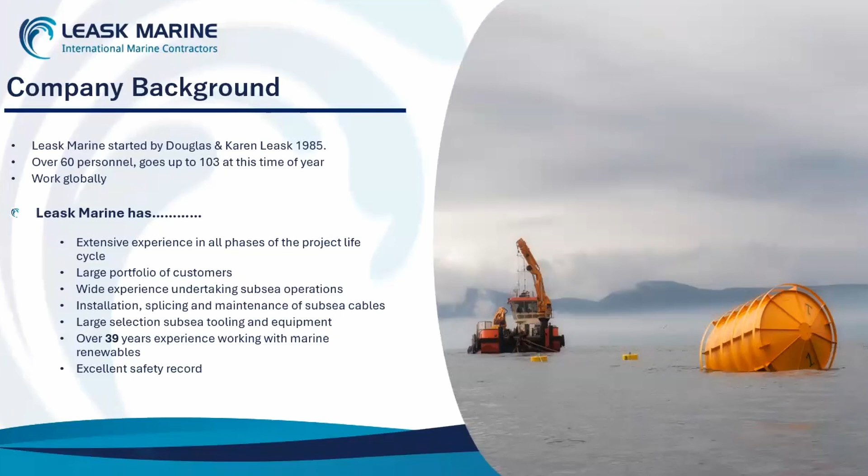With now over 39 years of experience, Leask Marine is in a prime position to make the most of the opportunities around Orkney, and has an excellent safety record which is highly valued by clients who come to use their experience. Over this period of time, they've undertaken a huge number of different operations, some of which are shown here on this slide.

Of most significance is the fact that they've operated for nearly 500,000 vessel operating hours and performed over 45,000 dives. The total number of projects engaged in is nearly 1,000, and over time this will continue to grow. They have experience in wave and tidal, offshore wind, marine construction, renewable infrastructure, and so many other things that go on in the seas around Orkney and increasingly around the world.

The fleet comprises a number of vessels. These have been built up over a period of time, and Leask Marine have extended from initially working around fish farms and small construction to now working across the world with a number of different vessels.

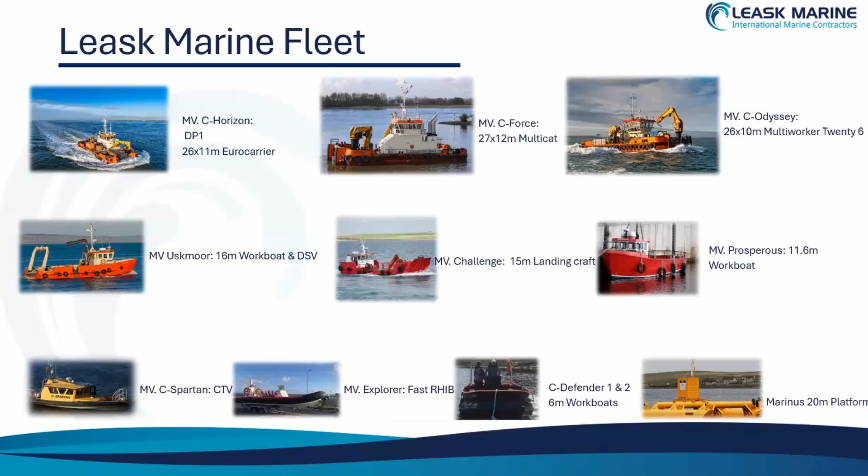The larger vessels are shown in the top line and are effectively centred around a vessel type called a multicat, which is a flat bottom vessel with cranes, rollers and large winches that allow it to handle heavy weights and bring them onto the deck.

The large part of the growth really came out of working with EMEC, the European Marine Energy Centre, which was set up in 2003 to test wave and tidal energy devices. It's centred in Orkney, and as a result of the number of developers who have come to the centre, this gives Leask Marine and others a significant customer base to sell their services to.

The number of projects engaged in is also extremely broad. They've worked with over 26 different tidal developers, 9 project developers, worked in 21 countries and operated in 13 of those. There have been over 200 projects in total in this space, and these are now extending into offshore wind and other similar technologies out in the sea.

It's seen as a major growth area for the company because the scale of offshore wind that's about to happen around the country, particularly in the north of Scotland, is considerable, and this presents a huge opportunity for marine contractors to make the most of the developments coming along and find ways to sell services to them. Leask Marine have been very successful in doing this, based on their experience and being able to show they know what they're doing in the harsh waters around the north of Scotland.

One of the most impressive technologies that exists at the moment is that by Orbital Marine Power. This is a tidal turbine, and the view on the left hand side is the aerial or plan view showing the machine on site.

The bottom right hand corner shows the point of launching of the turbine when it was towed off the floating, or submersible, barge by Leask Marine's vessels. The turbine was then towed up to Orkney and has been installed in Orkney waters, operating over an extended period, and is the world's most powerful tidal turbine, rated at just over 2 megawatts.

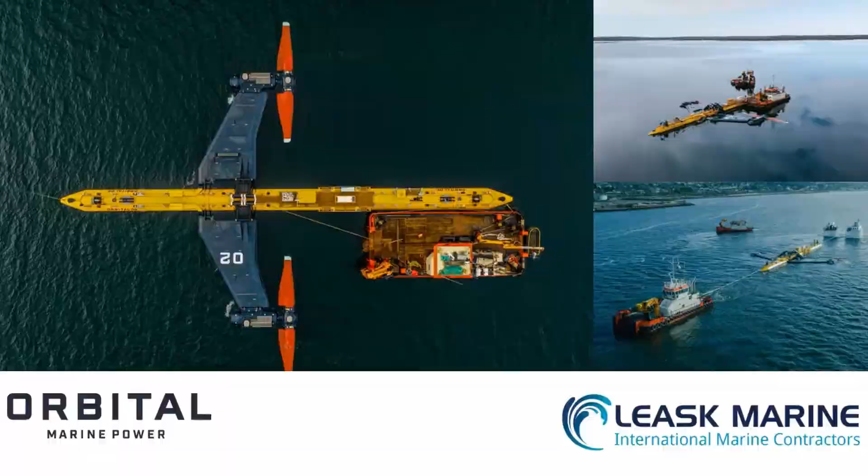But here, Leask Marine were able to provide the project management, the vessel charter, and also the whole issue of fastening equipment to the vessels, and making sure the whole system went off safely. The offshore trials were completed, and now the site has been decommissioned with the moorings removed back to shore and the site returned to its original state. Overall, the whole package was strongly supported by Leask Marine.

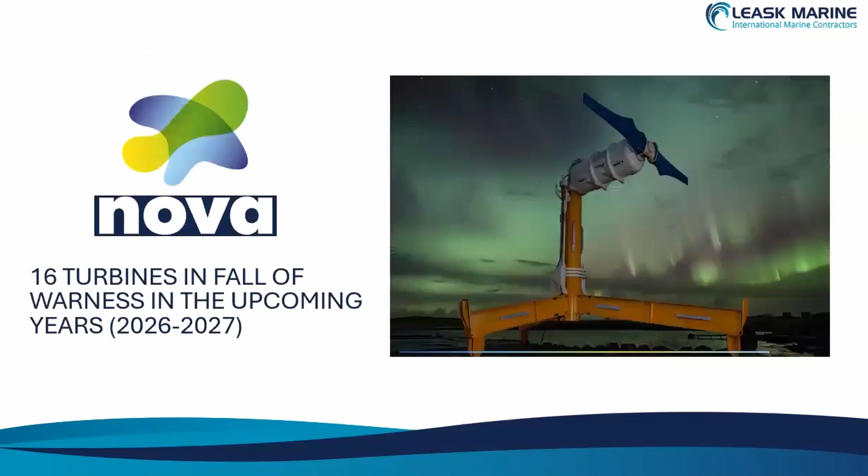In addition to those, there are other machines which are going to be coming along in the near future, and these principally comprise machines by a company called Nova Innovation, who have been doing work in Shetland. This work in Shetland was also supported strongly by Leask Marine, and they are now bringing their expertise down to bring their machines down to Orkney, and will be supported once again by Leask.

This is a photograph of one of the machines sitting on the quayside up in Shetland, and the intention is to bring some 16 of these turbines and install them on the seabed in the waters off the Fall of Warness, to be generating from 2026 to 2027.

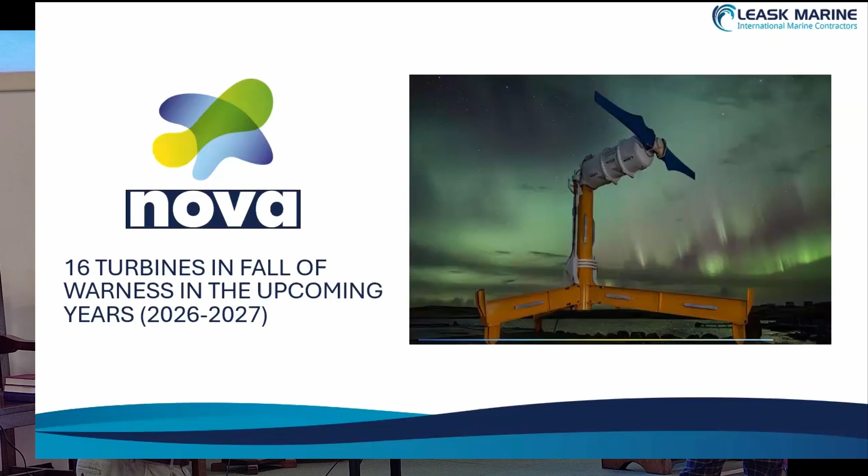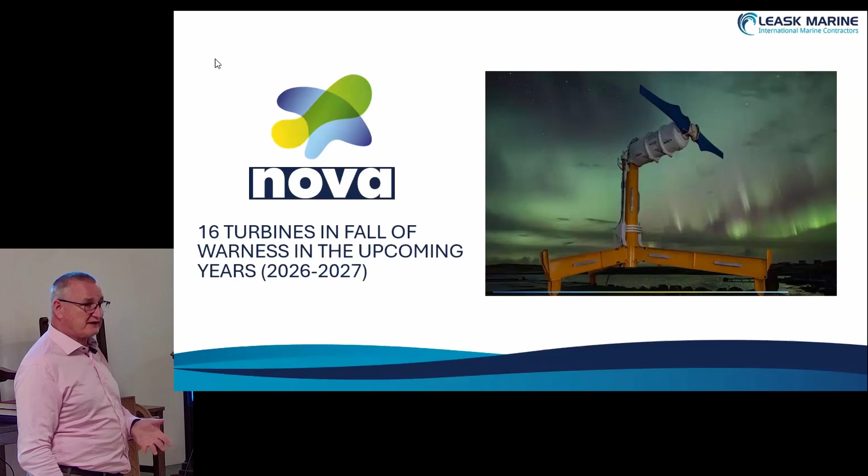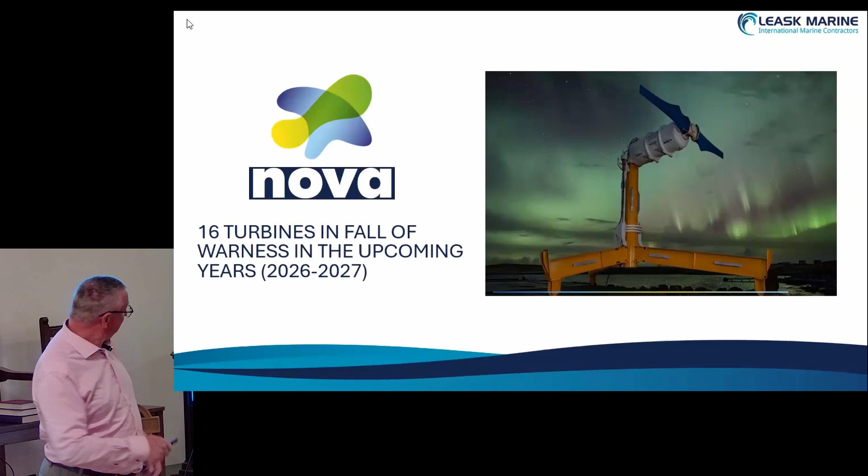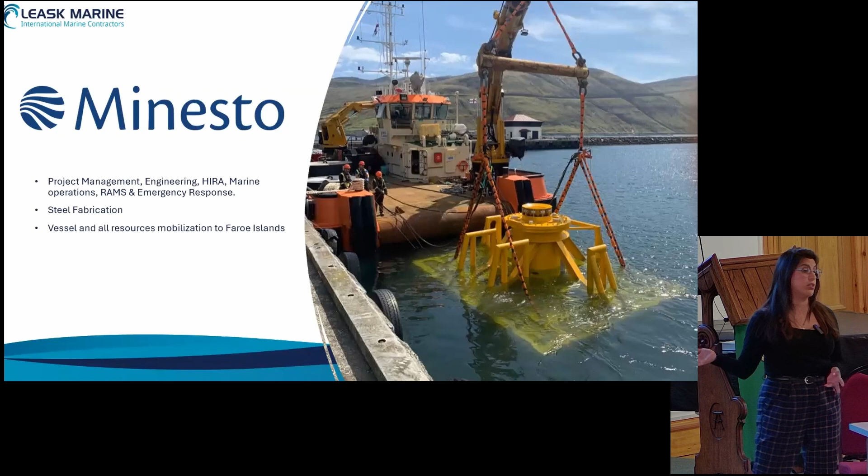Other developer that we've been working on is Minesto. They're from Sweden. Once again, they wanted to approach us for knowledge of working in the Fall of Warness. They're currently in the Faroe Isles. So we actually have work on the Faroes. We mobilize the full boats, and in this case, this is a gravity base that was actually fabricated in Orkney, fabricated by yourself here in Hatston.

I don't know if you know about Minesto. It's a slightly different concept of tidal energy. It's kind of a kite, so it looks like a plane, and it's in the middle of the water column. So it's a really interesting and really different approach to tidal development. It comes with a different kind of challenges that we haven't really seen here in the Fall of Warness, but it's all part of the lessons learned and still quite applicable.

So one of the challenging things when working with tidal is you actually need to target certain times of the year. You cannot really do the operations all year round because the tides are too strong. So we have to work in probably maybe 1 hour, 2 hours times a day, or per 6 hours, which is when the tide drops. It makes it challenging, but it's a lot of things we have learned through the years, thanks to all the developers that have come across EMEC sites.

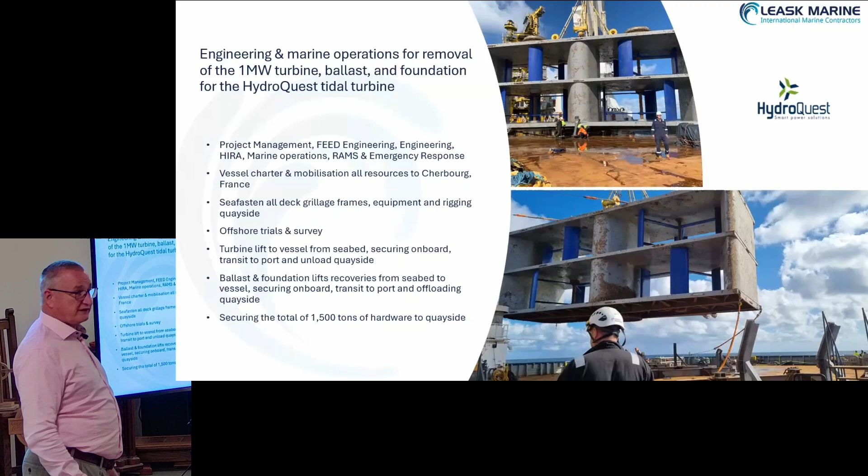Just a quick brief, because of our expertise we're now working further afield as well. This is a device that we've just taken out in France. So that you can see the scope and size of some of these machines, it was one of the 3 largest vessels on the planet that can crane and handle these devices, chartered in from Subsea 7 to manage this device. It was 1,500 tons of hardware taken back ashore.

We've also been working with developers around the globe. This is us doing studies in Guyana, South America, supporting the local Amerindian native tribes, where the cost of getting fuel airplaned out to these remote communities is hugely expensive.

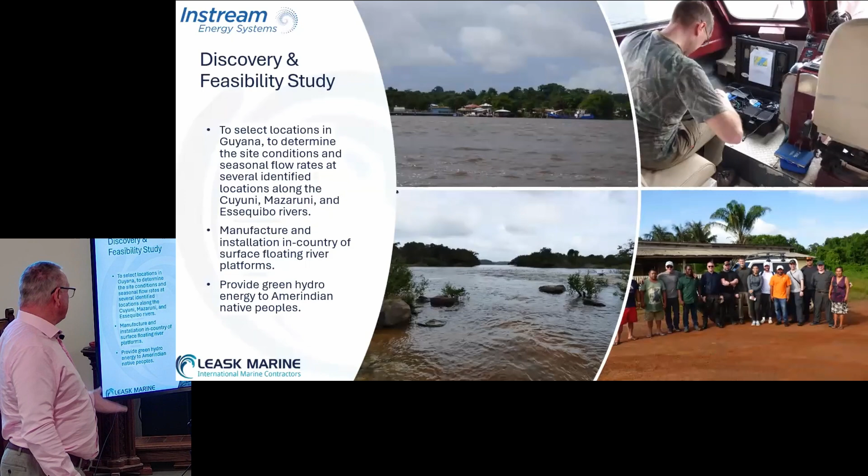If we can use local resources, i.e. the river, to generate power, it greatly reduces the need for the high cost of fuel being taken out to operate generators. Instead of running generators for maybe 2 or 3 hours a day for schooling, cooking, living, television, this technology lets us produce enough power with batteries for 24-hour operation. It becomes a completely normal way of life, which keeps communities together and encourages younger members to stay rather than feeling the need to go away. Hugely important, and again an example of this technology's influence around the globe.

A quick piece on offshore wind. The technologies we've used in wave and tidal also help in the offshore wind sector, especially with cable management and cable stabilization. We use a lot of our expertise from working in high tidal flow areas for things like scour protection in the offshore farms.

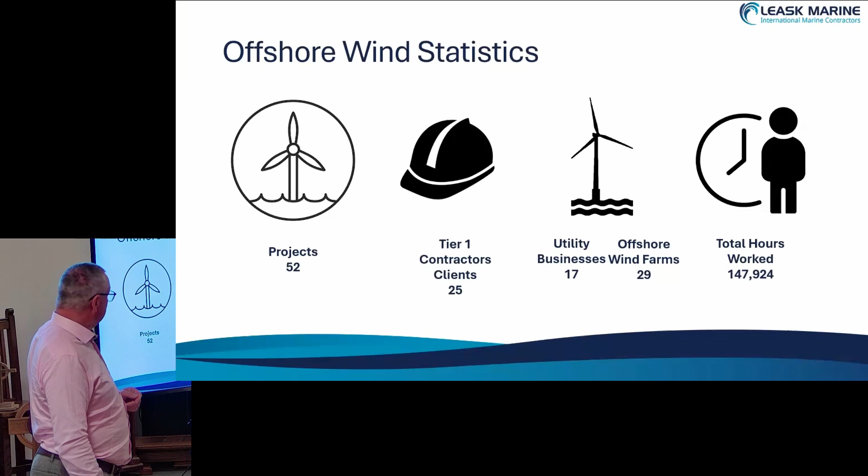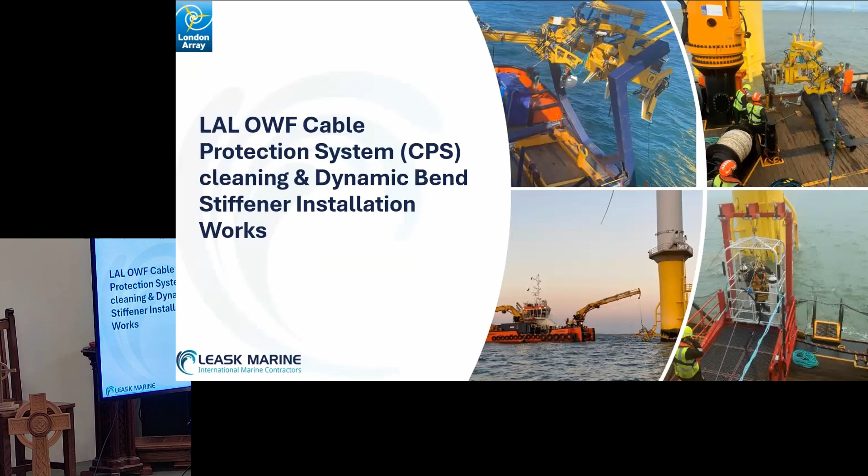So the kind of work we're doing here is cable protection systems. Elsa will explain in the top corner exactly what we're doing there.

Basically this wind farm has completed its first decade of life, and they're starting to see wear and tear or challenges they never really anticipated at construction. Now they're dealing with issues and trying to mitigate them. For example, this wind farm is in a high tidal range, and they never expected the tide to affect things as much as it's doing now. The cable is experiencing higher vibration than expected and is getting fatigued, rubbing against the platform itself, which could create a major issue—if one cable goes, they could have to shut down the full line or the full farm, a major loss for the industry.

So they approached us to see if we could help, and we said yes. A lot of what's happening here is things I'd never come across before, and we're really proud of that—we always think outside the box and try a different approach. As John said, working on tidal wasn't new for us, but it was new for offshore wind.

So for that we worked in conjunction with a wind farm and another company to create bend stiffeners, which help to stabilize the cable. For this we actually needed to use a lot of divers, which is one of our strengths, working in tidal conditions with diving.

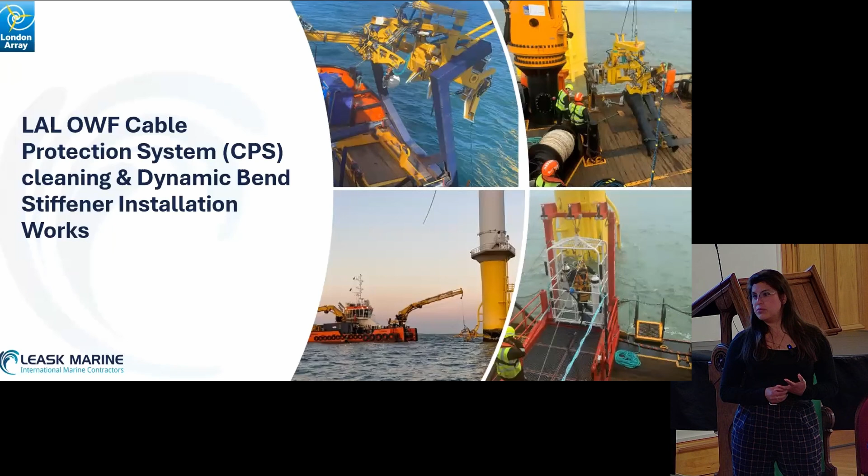It's not an easy task. We've been working on around 100 turbines over the last couple of years, basically installing bend stiffeners all around. As you can see, we needed to create deployment tools that didn't exist, so they're all in-house inventions, fabricated in Orkney. They're not the most magnificent technology, but it doesn't exist otherwise, and if it doesn't exist, you can't really help it.

So that's a LARS system, or we call it a LARS system - it's a launch and recovery system for the bend stiffener, as you can see here. We've done a lot of lessons learned.

As I say, we've worked along different years now, so we're learning from our own mistakes to make it easier for us. At the beginning, we just used to crane it inside to approach the turbine. For the next campaign, we realized it's not the best way, because of the influences of wave, wind, bouncing, and all of that. So we created this tool, which makes it way easier and safer for the diver, and we've been working on that.

We're also trying to encourage offshore wind to take practices from wave and tidal. For example, we work a lot with moorings - 4-point moorings is mostly a must for us on tidal sites, but offshore wind has never used them. So it's always a bit of a challenge to convince them that nothing is going to go wrong.

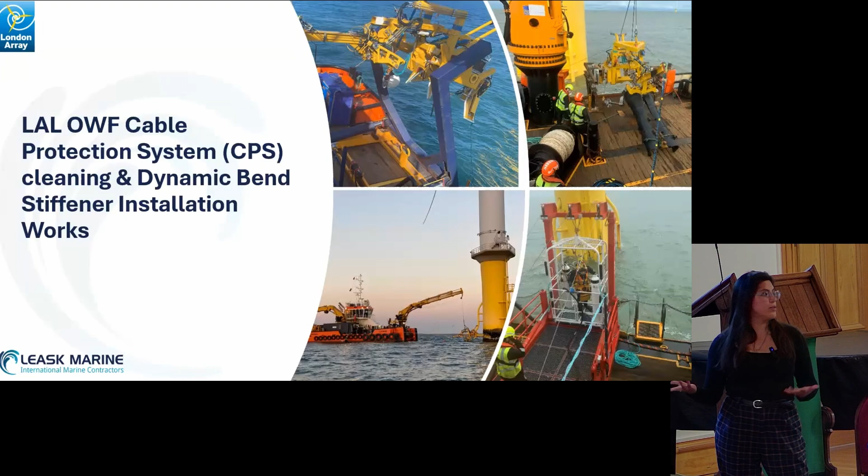So again, using different technologies - this is another one of our drill rigs. We're actually now developing anchor and seaweed, mussel and seaweed installation between the offshore wind farm pylons, so what we're doing is utilising the footprint and space for multiple technologies. You've got an offshore wind farm creating wind, but between that we can run mussel and seaweed lines so we can grow seaweed and mussels, using the space better and greener as well.

So these are technologies we're developing with these companies - we're doing this in Belgium just now, putting in 200 as we speak, they're offshore doing that today. So just to give an example of being developed, working from Orkney, we're using technologies from other resources. We want to convince these offshore wind farms to also use the possibility of wave, so that multiple green technologies are being used in the one space.

We're working at the moment on something you might start seeing on television over the next 2-3 years - the Princess Elisabeth Island. This is going to be a man-made island in the middle of the North Sea in Belgium, and we're creating a natural harbour for vessels working on all the offshore wind farms in the North Sea to come in and recharge their batteries from this safe harbour that's been artificially built in Belgium.

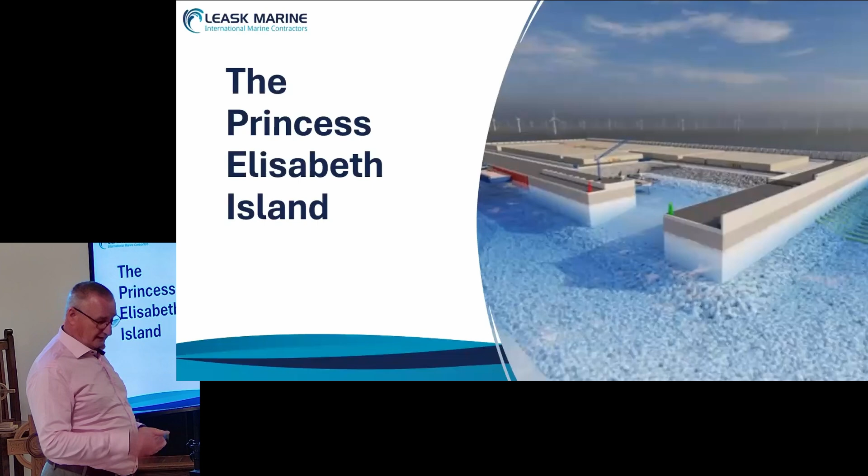Quick one - when we say we're working everywhere, we are working everywhere. In the USA, they don't understand multi-cat style vessels and are just getting into offshore renewables. Because of that they don't have the experience or technology, so they're using European companies, Dutch and Italian. Because they've worked with us over many years, we're out there helping. We've been doing that for a number of years and will continue to do so this year and next.

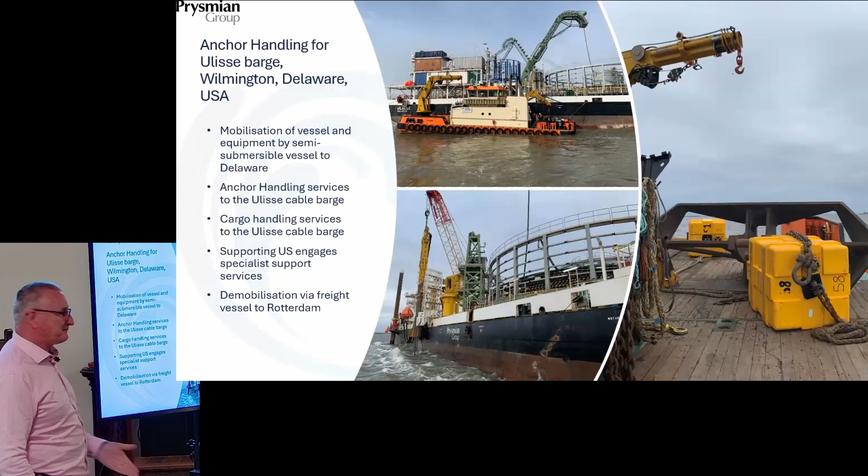We've been up in Canada doing work as well. So what we're trying to say is, for a local business here in Orkney, we're quite proud of the fact that we get called in business to business all over the globe. A lot of the stuff is what we call nearshore works, so for the electricity to come from these turbines, they need to come ashore.

So what we do is a lot of the shore works, the capping, the punch out is when the drillers punch out through the seabed, and therefore we then need to put in the ducts. So if anybody's in Scapa Flow at the moment and sees long lines of pipe sitting there and wonders what it is, they're actually 1.4 kilometres long, and there's 4 of them.

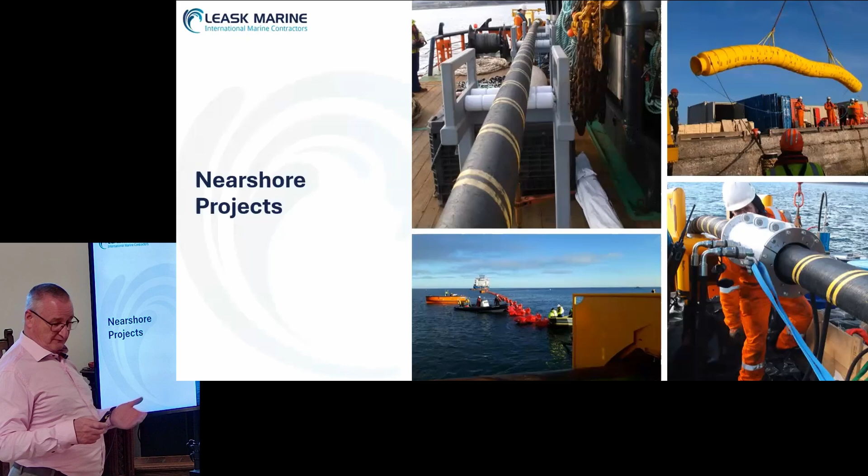We're putting them in at Hornsea 3 offshore wind farm at the moment. On the southeast coast of England, we're going to be towing them down. The first one will get towed this weekend, and we'll be inserting them up from the sea up into the shore. So again, we're at the forefront of technology development in these offshore wind farms, and it's involving Orkney and Orkney companies.

That's a spelling mistake by me. For anybody that knows Nairn, it's Ardersier, not Arbersier. So what we're doing in Ardersier at the moment is, Ardersier was an oil and gas manufacturing platform base near Inverness. It's been shut and mothballed for many, many years. I'm from Nairn, so all the family worked there for many, many years.

And it's been mothballed. However, the port is being started up again for offshore floating wind, so they've got the first contracts there. It's silted up so badly over so many years that we are down there just now.

We're doing what's called PUXO, possible UXO, unexploded ordnance. So we go down there and we clear the potential UXOs, and also clear it so that the big dredging vessels can come in and dredge. So we'll be doing those works for some time.

But again, all this technology developed by ourselves. So we'll find the spot that we think there's a possible UXO, we'll clear it, we'll put it through graters. We've got magnetic metal detectors and magnetic detector bands and magnets in here to make sure that we collect everything that's coming out of the sea and there's no debris going back overboard. What we're helping here is using more energy transition from other uses, ports that have been mothballed, to get them up alive again for the renewable sector.

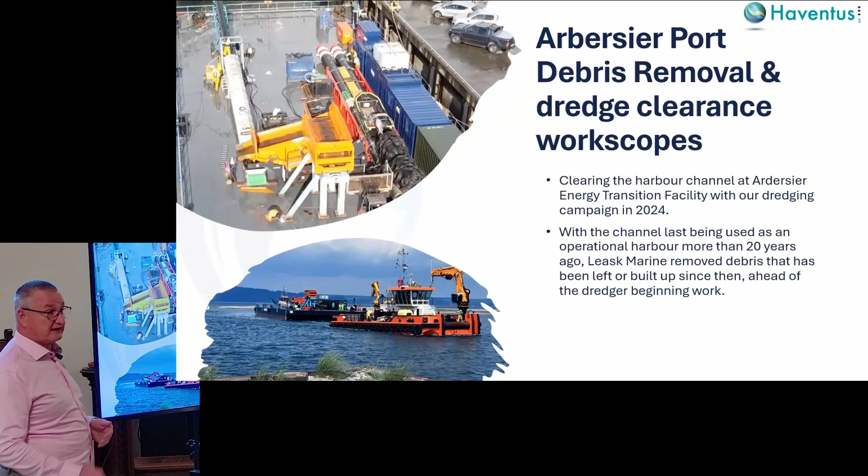Being a new industry, there's always a gap, and you don't really know there's a gap until you stumble upon it. So that's something that's happening to us quite constantly, I would say. But we face it basically as a new challenge. It's quite interesting as an engineer, at least, probably not for everyone, but it's always quite cool to find something and realize, oh, I don't know how to do that, and there is nothing outside to do it.

So through the years, we have developed our own tooling. We do the usual thing, we try to go off to the market, suppliers, and be like, do you have something for this? And we start getting a lot of no answers. Instead of just accepting that, we have to think completely differently. We're like, well, what we really need is something to do this. So we take up the challenge ourselves, and we started developing our own technology.

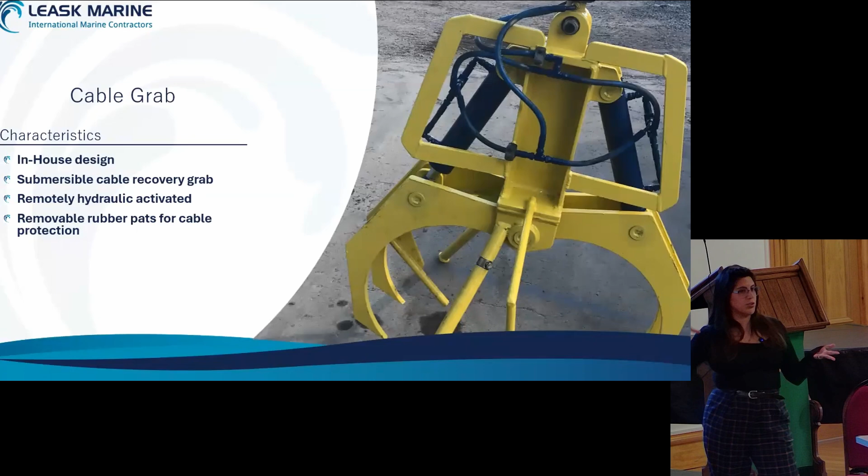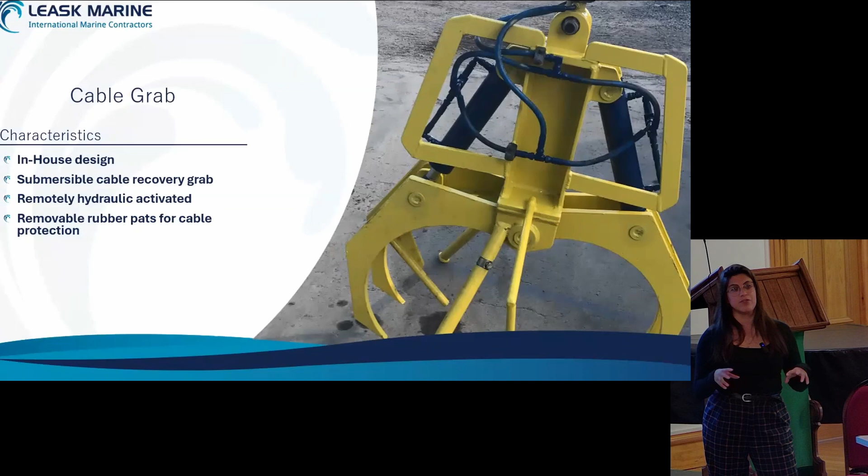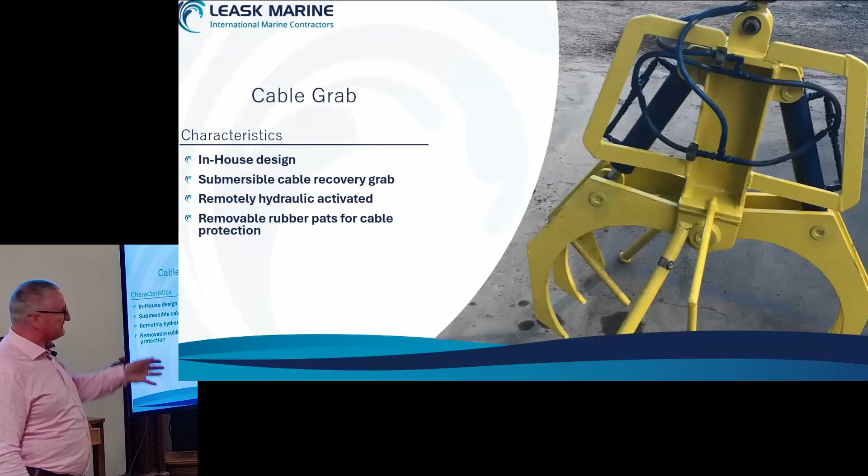Could be as simple as hydraulic grabs. Hydraulic grabs is basically, you've seen Toy Story and the claw, no more explanation than that. But given the special infrastructure on the seabed, sometimes a standard grab doesn't work, doesn't do the job. So we have developed a couple of grabs over the years. They're ultra sensitive, so that they're not going to break the cable, the infrastructure assets. When you're dealing with cables that are hugely expensive, you don't want to be breaking them.

It's for stuff like that we're developing. Same thing, we are constantly recovering chains, so we develop more grabs. We have created more in-line unit storage, that's what we call it. Basically, something we leave on the seabed ready for us to collect, and it's basically saving time and saving more work for us. So we leave it on the seabed ready to collect.

We have developed what we call a recovery post, very simple on the name. Basically, you have a cone that locates on top of it with a hydraulic shackle. Hydraulic shackle is basically a pin that goes hydraulically and closes when you have your target on view. It usually works with a drop camera. So that's something else we have developed through the years of doing operations.

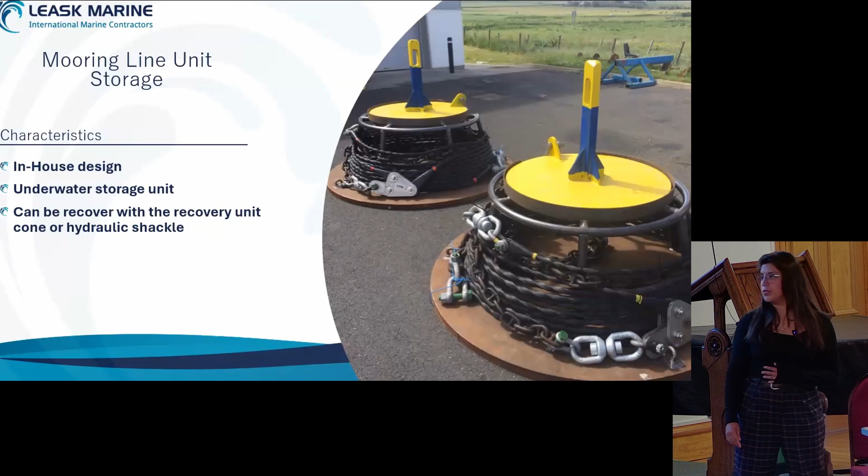You want to move to the next one, Joel? It doesn't want to. Oh.

And probably the biggest one, or the most challenging, interesting one, is what we call the Raptor SDR.

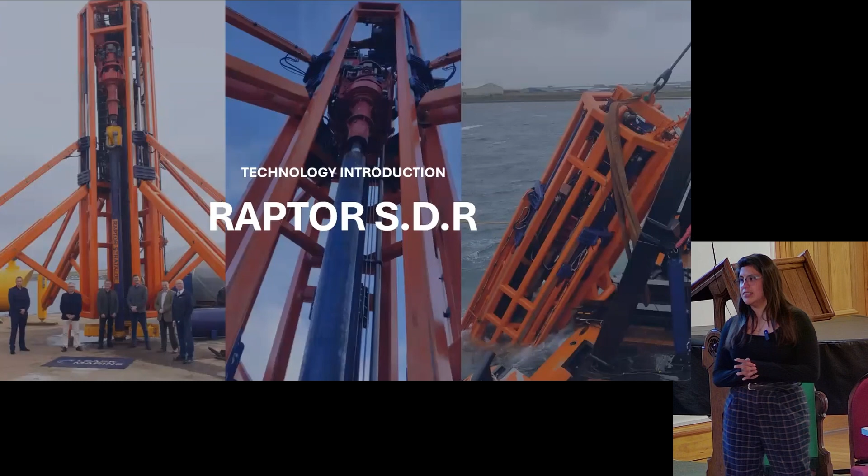SDR stands for Submersible Drilling Rig.

Developers kept approaching us trying to install rock anchors. We went onto the market probably 6-7 years ago, and there was nothing out there, or the things that were out there were completely out of budget for a lot of developers. We have to remember that developers usually work on a really tight budget, so they don't have the luxury of hiring a massive drilling rig.

So when we realized there was nothing out there, we decided to start making one ourselves. It's been in the making for 5-6 years now. It started completely in-house, just hand sketches, board sketches, everything we could throw at the board to figure out what we needed.

And at the end we came up with the Raptor, which you may have seen upright in Hatston a couple of times. It's not hard to miss - it's big and orange, quite a unique thing. Some people sometimes think it's a rocket. It's not a rocket, it's a drill rig, guys.

Elsa undersells herself - she developed this technology, she designed it, and we built it here in Orkney. It's been a £3 million investment, which is a lot for a small business like ours, but we're really proud of it.

These legs slide up, as you can see, so it can pack into a 40-foot open-top container and go anywhere in the world. It's been developed so it can work over small multi-cat style vessels, so you don't need a big drilling ship. So what we can do now is put in an anchor at one tenth of the price of getting a drill ship in.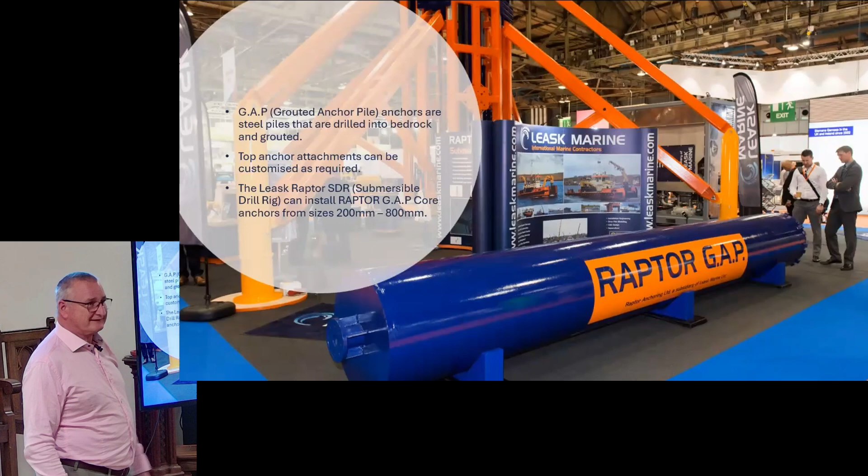So it's properly developed technology, and to support that we've actually got a range of anchors and anchor-type solutions we've developed as well. This is what's called a grouted anchor pile. The cutting teeth are at that end, and it just grinds its way down until you've got to the depth you want, and then it releases.

We did the first project - it's been with a developer for a long time now. The first project was actually done last December, which probably wasn't the best conditions of the year to do it, but we always like a challenge - why not December in the Faroes?

We've been working with a developer, Minesto. New technology always creates some fear, and we are trying to engage with developers to trust us and prove that this is the way forward. The industry needs to reach commercialization and simply cannot do it the way we're doing it right now with a lot of gravity bases and a lot of chain.

The footprints are getting fought over constantly, as John said. We're trying to optimize spaces on wind farms already, so there's a real synergy of different industries in one place. For us, this is the way forward - we need a smaller footprint for these devices.

So Minesto was the one who trusted us to carry out the installation of our first anchor. We installed it in the Faroes, where there's a massive tide as well, about 7 knots, which is basically almost the maximum we can handle.

We were working on a site that's 80 meters water depth. The drill rig can go up to 100 meters - at the moment it's designed for that, simply because of the limitations of pumping hydraulics into it. It probably can go deeper, but we've limited it to 100 meters for now.

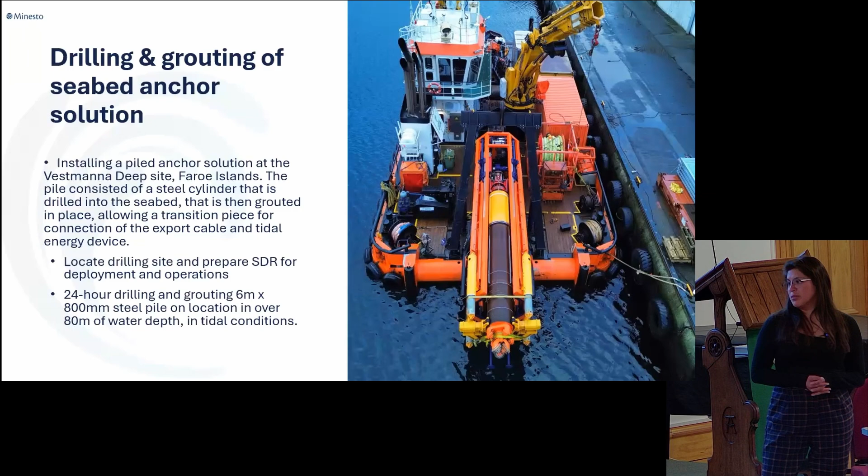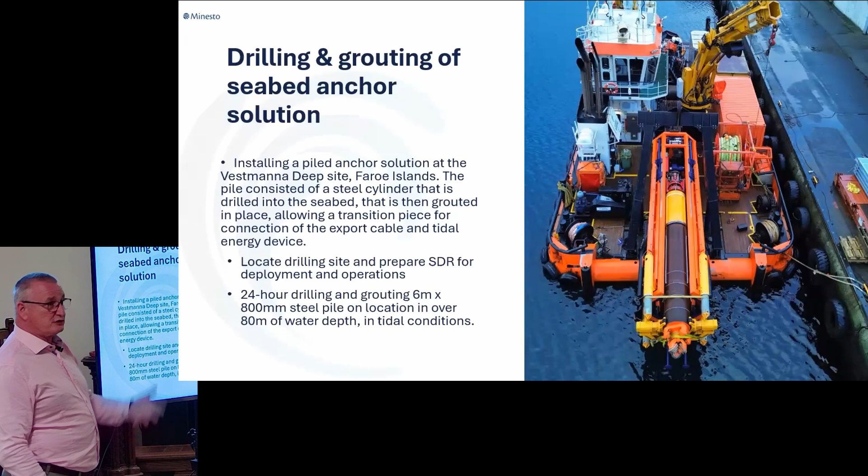So it's an improvement all around. This anchor itself is 12 tons in weight, with holding capacity in excess of 2,500 tons, somewhere about that. The holding capacity of these things is quite incredible, and that's what we need if we go to arrays of devices. That's the purpose of moving these technologies forward - but they have to be cost-effective for developers.

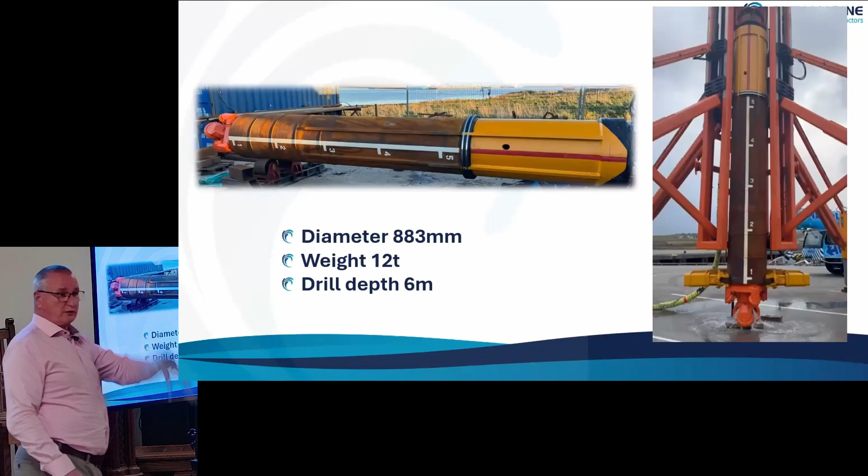This is just so you can see the cutting heads there. They're sacrificial, so they stay in with the grouted pile. Basically the anchors get tailored to whatever the need of the developer and the rock itself, because you don't really know which cutting head you'll need until you do a bit of site investigation - which is another thing we didn't realize.

There was a lot of things lacking in the industry. When we started engaging in anchoring solutions, we realized we need to know what kind of rock you're drilling into - it's pretty basic if you think about it, you need to know which rock you're going into. But apparently no one has done enough ground investigation around sites anywhere, which was a big shock for us, a major surprise honestly. So when we approach our clients we always say we need to know your site characteristics, what rock you're going into. And the clients were like, well, we don't know. And we're like, okay, why not?

So once again, we went out to suppliers to see who could do ground investigations, and once again the only thing available was massive boats. So our approach was - we already have a drill rig, why don't we try to see if we can actually extract cores and do ground investigation ourselves? So that's what we did.

Our most recent bigger campaign, which is pretty fresh, we did last month - it was actually here in Fall of Warness. We did 4 core samples in Fall of Warness. This is for Orbital, who are getting to the next stage and want to know the possibility of installing rock anchors, which they're already committed to as well. So we're doing all of the phases, and we extracted 4 core samples.

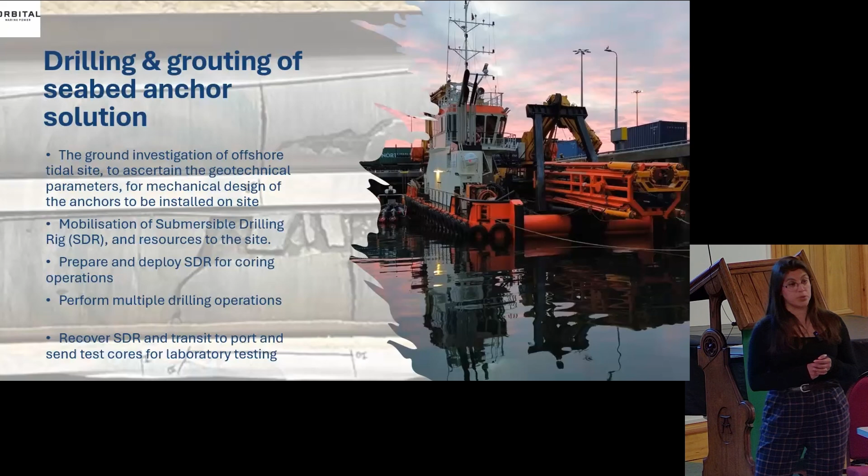And we're getting a lot of interest, not only for tidal but also for offshore wind. Scot Wind has approached us, Thistle Wind Partners has approached us, West of Orkney has approached us, because they don't have enough information on their sites. So we're in current conversations with them about what else we can do. We're also being asked about a couple of other projects in Belgium and France, the Canary Islands, and off the coast of Portugal as well, because once again they couldn't find anyone to do ground investigation to the depths our drill rig can reach. It's still a new scenario for us, so we're still learning a lot of things.

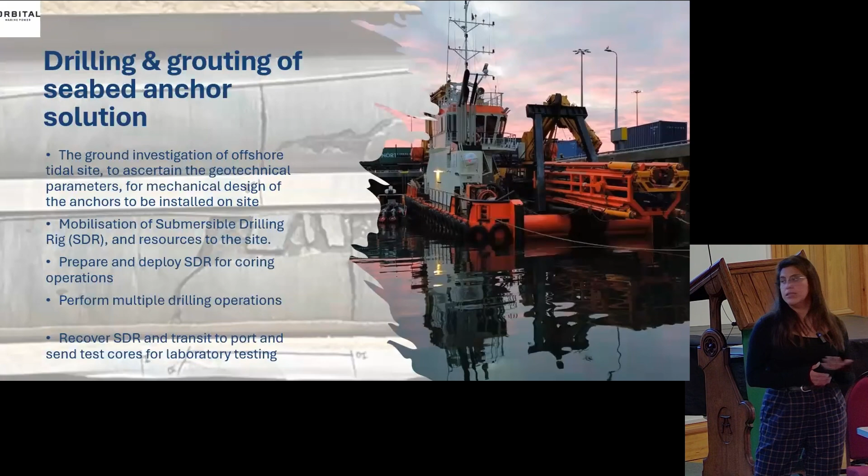But the technology now at least is available for whoever wants to use it.

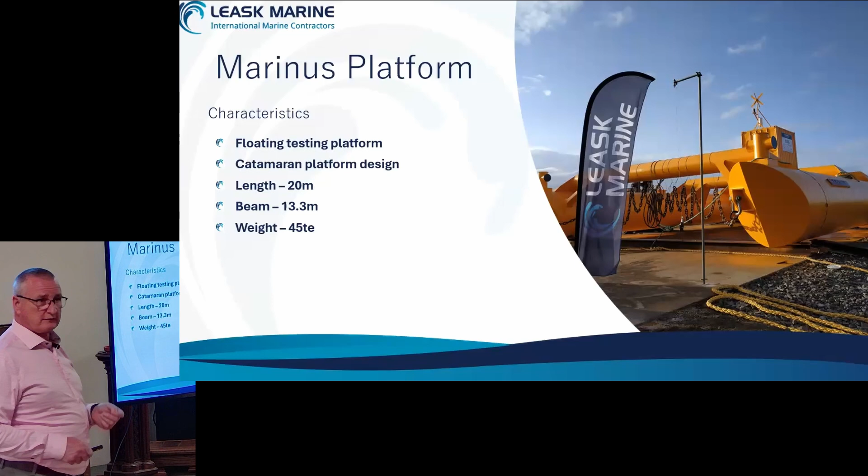We also have fabrication workshops, and this is one of the items we've built - a platform that's currently in Morlais in Wales, with a range of technologies on board for site investigation and mammal watching. Basically they're setting up the site, and they want to know what the impact on mammals will be, the actual tide direction, tide speed, wave frequency, and marine traffic as well. So it's basically kind of a survey buoy of sorts at the moment.

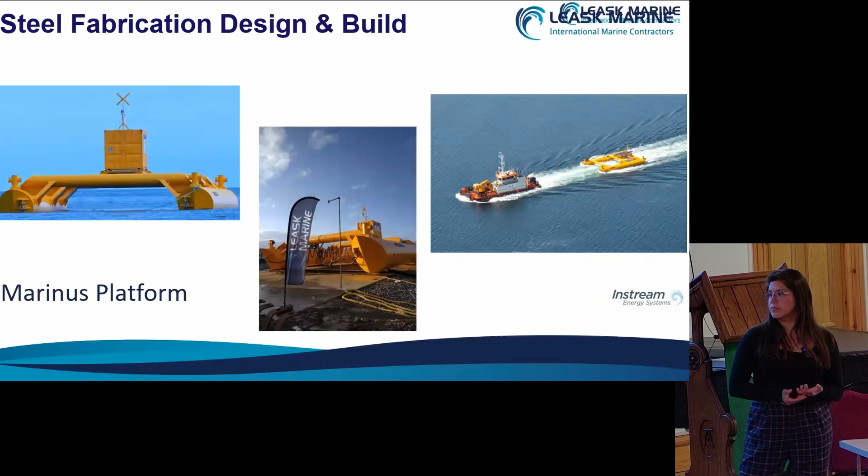That's her. So a quick resume on other stuff that we're up to, which is related to renewables as well, and comes from other parts of the globe.

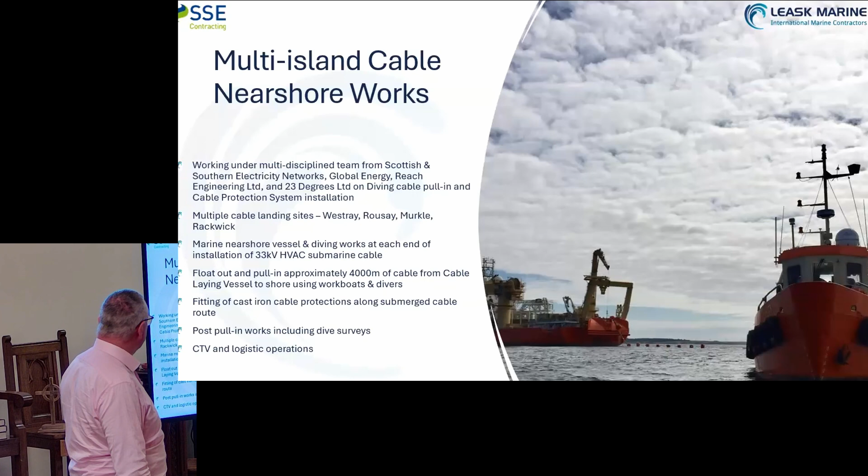We're doing a range of multi-inter-isle cable works, which you've probably seen improving around the Orkney Islands. Faroese Telecoms, all their telecom cables actually come through Orkney, through the UK, and then up to the Faroes. So we actually manage all their cable management.

Different types of cable stabilization are needed, depending on what's been affected, whether it's a fisherman pulling his anchors a bit too actively, or scour protection issues, because what we don't want is free spanning of cables or pipes. Big gaps underneath will have an impact.

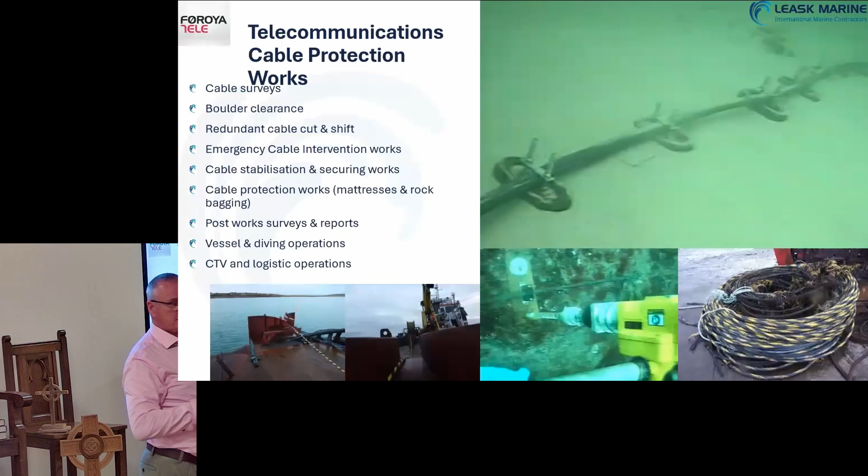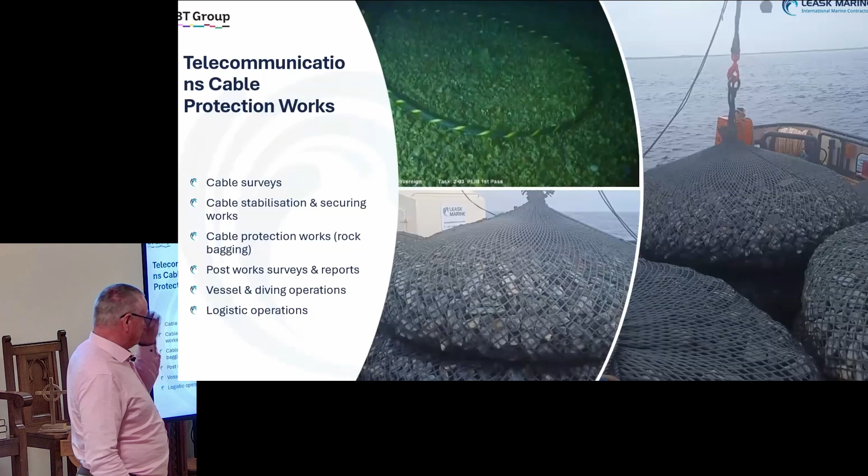So what we do is regular jobs for companies like Faroese, and BT, so anybody that's on BT, we support all their underwater cabling by different means. Rock bagging's one of the regular ones we're doing, just to hold them where they are.

And then there's companies that you think, oh, do we mention companies like Shell? Yes, well we do, because it's energy transition. They're coming into the renewable sector, investing in it, and coming to companies like ourselves to help them develop their technologies as they transition from oil and gas into the renewable sector.

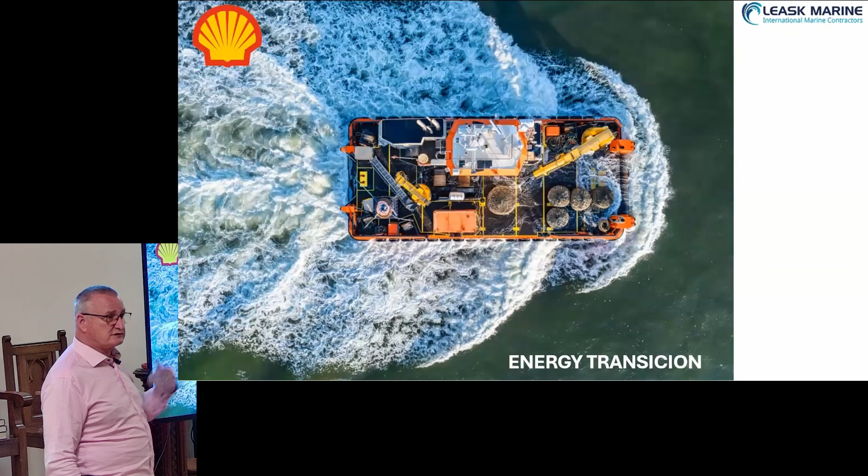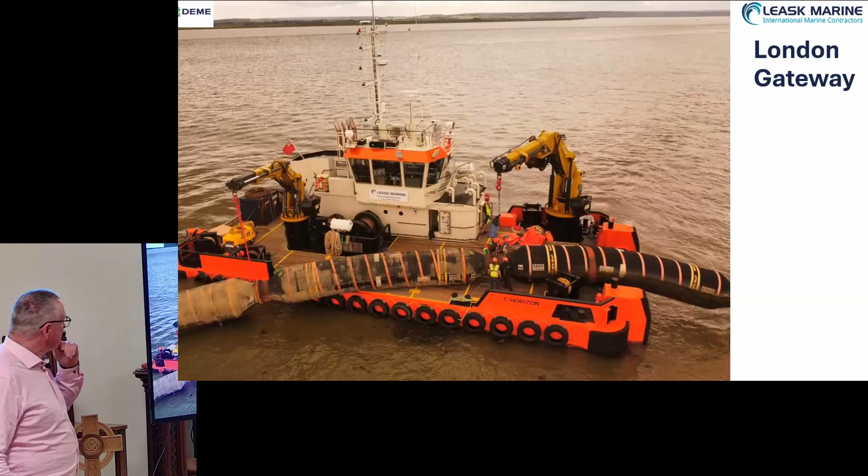We welcome that. Just to give you an idea of the size and scale, here's another one of our multicats. If you see the size of the person there versus some of the pipelines we're managing, when you just say you're doing floating pipe management, nobody really understands the scale of it. But if you see the people standing next to it, you understand the size of the work we're doing. This is London Gateway, which will be a huge, multi-generational project over the years.

We're also developing and working with companies trying to ensure we get things like plastics and nylon and other items out of the sea while we're putting in things like concrete mattresses. What we're trying to do is make sure we don't leave a bad footprint there as well. So we're looking at plastic-free marine mats.

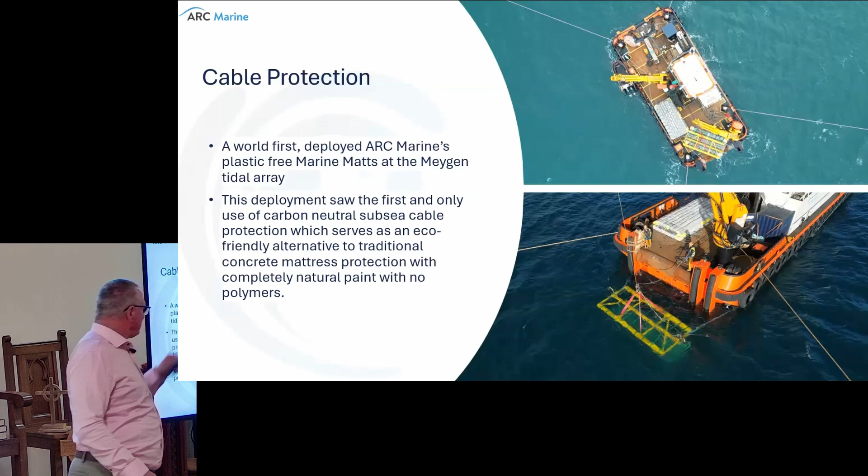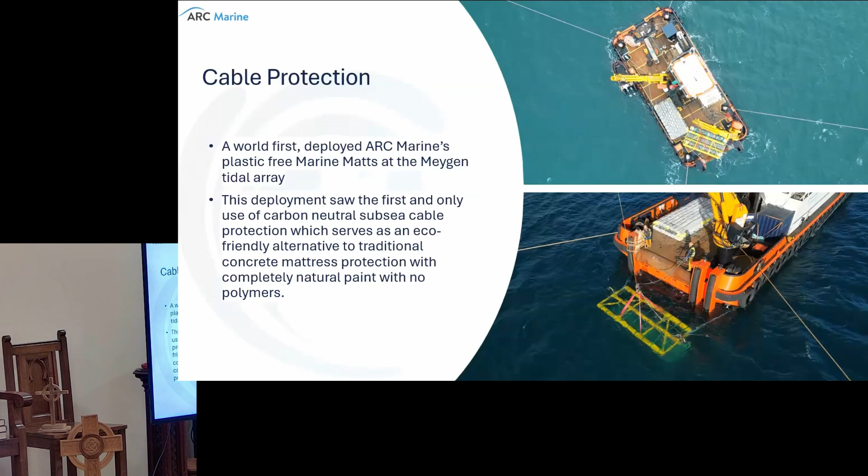We're looking at mats that will also encourage wildlife. Some of the mats will have different types of grip on them for different types of marine life. They're basically texturized, to encourage marine life to develop in there. So they're not like an alien object—or well, they will be, but they'll be welcomed by all the little creatures of the sea.

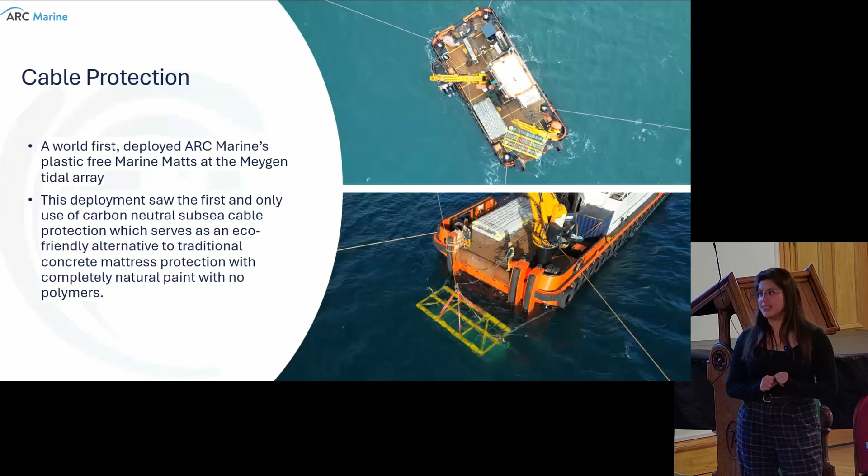We're working in Germany to the UK at the moment, and we're just about to start more works there. This is a really interesting project—we're helping a company develop a seaweed farm in Alaska. They've already got one in Namibia. Seaweed production is on the up and up globally, and we need the spaces to develop the growth.

And these kelps, how long are they? They're really big. I don't remember the exact size, but I think the rate they grow is like probably 30 centimeters after the first year, almost per day.

It's a really good business to get into. So you're in and they're actually harvesting like a farmer would harvest, but they're just nipping off the top and coming in regularly doing that. If you think of 30 centimeters a day, these are 12, 15, 20 meters. They're basically in a water depth of like 30 meters, and they just drop in the first 2 to 3 meters of it, then continue harvesting.

For those that have seen the other works, has anybody seen that pier in Scapa Flow recently? Again, we've done work like ROV, UXO, bathy survey, cone penetration. The UXO was exciting because right where they wanted to put the platform, there was a torpedo. So we had to deal with that first, which was a slight delay to our coming in.